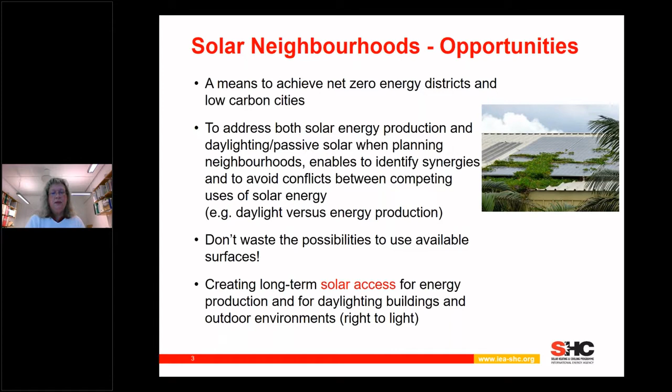So we shouldn't waste the possibilities to use available surfaces in neighborhoods, and we need to create long-term solar access. This is very important. For instance, if you have a house where you put solar panels on the roof, you don't want your neighbor to erect a building on the other side of the street just a year after, destroying your solar gains and your investment. So you really need to secure access to solar access for a long time, and this is something we need to be better at when planning cities.

Going to the project specifically, we started in 2019, and the project ends at the end of 2023, so we are midway now. The objective is to support key players to achieve solar neighborhoods that really facilitate this long-term solar access with good planning.

We work on new neighborhood development and on improving existing neighborhoods as well, dealing with both active and passive solar strategies. We define a neighborhood as a group of buildings within a specific geographic area, often including different types of buildings and functions, open space and infrastructure. The neighborhood can be part of a large city, an isolated community, or something in between, and of course it can be connected to a district heating or cooling network or outside such, which gives different boundary conditions we have to take into account when planning.

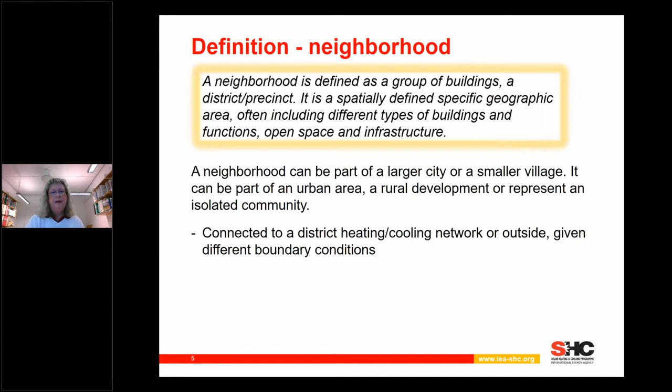And with this, I stop my very brief introduction. Thank you for listening.

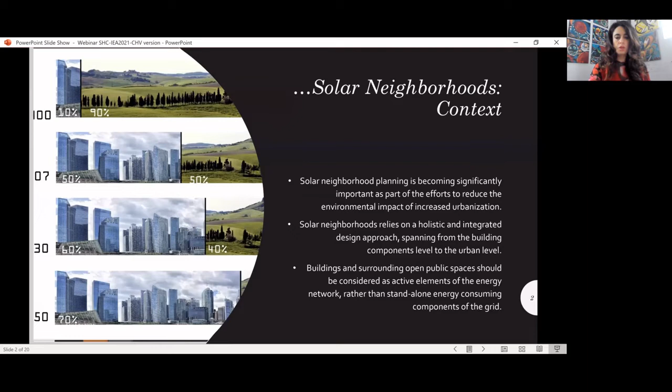Starting with a little bit of context, solar neighborhood planning is becoming significantly important as part of the efforts to reduce the environmental impact of increased urbanization, where by 2050 we are expecting that 70% or more of the world population will be residing in urban areas.

Solar neighborhood relies on a holistic and integrated design approach that spans from the building components and building level to the urban level. Within this holistic approach, buildings and surrounding areas, including public spaces, landscape, streets, and street furniture, should be considered as active elements of the energy network rather than standalone energy consuming components of the grid.

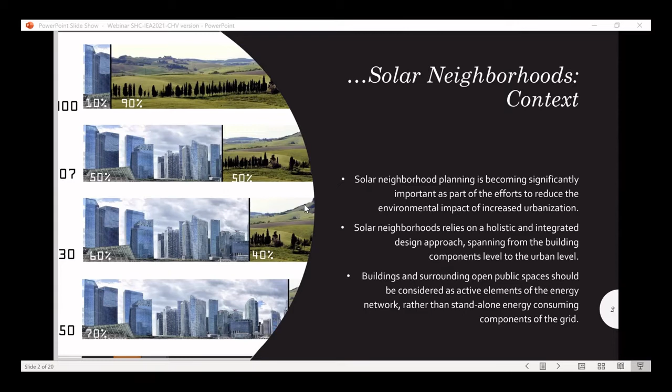So at the building level, solar building design relies on passive design in buildings. In fact, passive design is often attached to solar building design. Improving solar access together with various design principles such as thermal mass, high insulation, and airtight envelope are some of the basic principles of passive solar buildings.

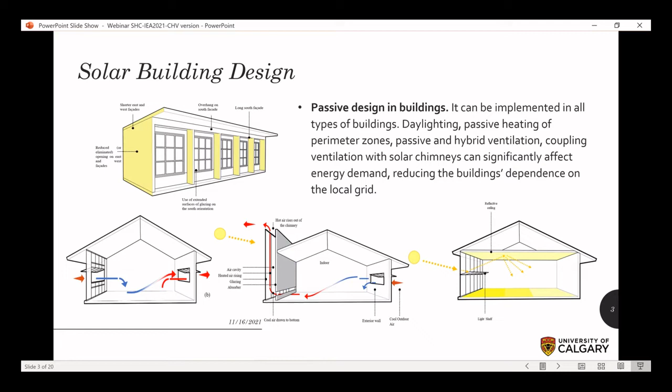Solar building design allows improvement of energy efficiency of buildings, designing building shape, layout, and building envelope to maximize solar access and utilization within the building, affecting the energy consumption of these buildings. It also allows better designed solar energy generation, since a well-designed building envelope can be exploited to integrate solar technologies such as photovoltaic systems, thermal collectors, or hybrid photovoltaic thermal systems for the generation of electric and thermal energy.

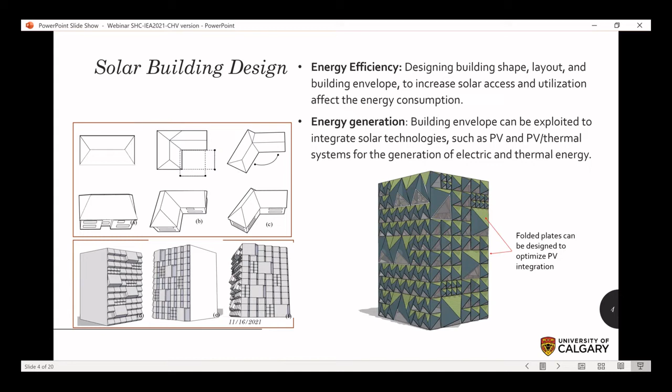Talking a little bit about building envelope design and the integration of technology, building envelope can be optimized to maximize the surface area and the exposure to solar radiation while presenting architectural and aesthetic flexibility. These are some examples of a theoretical study done by myself and my group at the Solar Energy and Community Design Lab at the University of Calgary, where we tried to optimize the building envelope shape and geometry through different designs of folded plates that allow maximizing solar radiation on these plates. We were also integrating different types of photovoltaic systems in different colors.

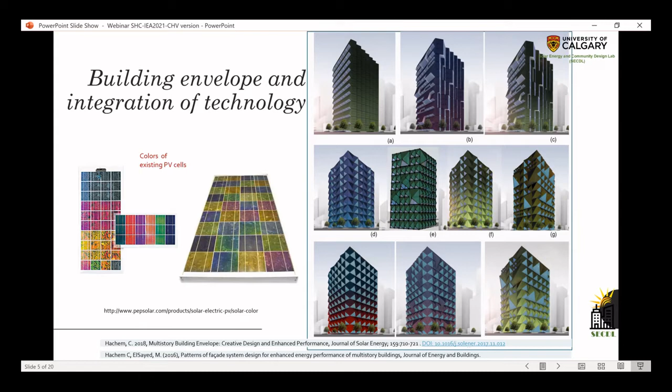At the level of neighborhood, many aspects affect optimal solar planning. For example, the type of neighborhood and the building mix present can affect the building designs and, as such, available surfaces for solar technologies. Also, the ratio of commercial to residential buildings within a specific neighborhood type is important, especially when the goal is to achieve a net zero energy status.

An optimal ratio of commercial land area to overall built land area can be between 23% and 32%. This is according to a theoretical study that we conducted, where according to this ratio, we were able to integrate enough photovoltaic panels to allow achieving net zero energy within a mixed neighborhood.

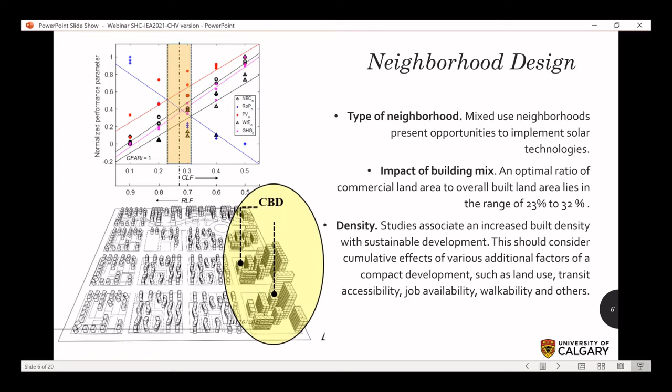Density is another important and critical factor in the design of solar communities. Studies associate increased build density with sustainable development, but this should consider cumulative effects of various additional factors of a compact development, for example the land use, the transit accessibility, job availability within walkable distance, walkability, and others.

There are other important elements in the design of a neighborhood that also impact their solar access and solar potential, and their design as solar neighborhoods. This includes green and spatial areas. Landscape can offer solutions for the integration of photovoltaic panels as well as solar thermal collectors, and allows us to generate more energy that can be utilized in these neighborhoods.

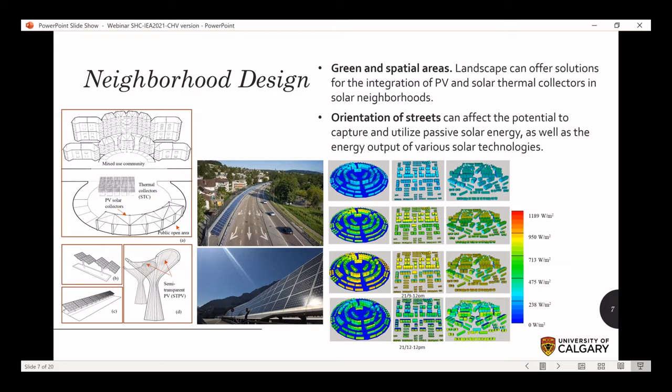Orientation of streets can affect the potential to capture and utilize passive solar energy, as well as energy output of various solar technologies. As such, they really should be considered from early design stage, and the buildings around them should be designed to get the best performance with the best orientation.

Now, talking a little bit more in detail about the work currently ongoing in subtask A, we developed specific designs of archetypes to study solar strategies. Archetypes in this task are considered as representative neighborhoods of existing or new patterns in different countries. This includes repetitive patterns of commonly applied design, such as streets, building types, shapes, density, etc.

Other examples of archetypes can represent uncommon or innovative examples. We have a few of these that were also presented and proposed by the experts in subtask A, such as Sinfonia in Bolzano, the campus in Norway, and so on. Other archetypes can be theoretical cases presented in literature, or especially developed to study different strategies.

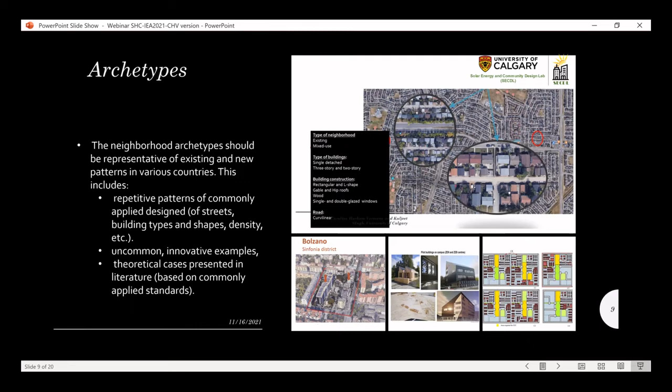Here are some examples of theoretical neighborhoods, and I'll be talking a little bit about these and some examples of the results that we obtained in a couple of slides.

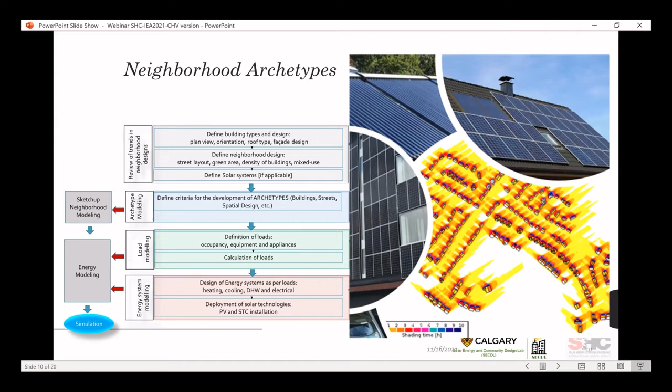The methodology is developed also to collect information about these archetypes, including building types, materials employed in buildings and building envelope, outdoor areas, and also materials employed in these outdoor areas, streets, etc. This information is collected in what we call a matrix, an Excel form that can facilitate input into various simulation tools, allowing urban level simulations. Once the base neighborhood of each archetype is established, various solar strategies can then be analyzed.

Here I'm presenting some of the theoretical examples I just mentioned of neighborhoods, what we call neighborhood units. These are small neighborhoods designed according to various sustainable measures, ranging from residential dominated neighborhoods to higher density neighborhoods with commercial centers that include different types of trades and different types of buildings.

The study aimed at analyzing various renewable energy and the role of solar energy for thermal and electrical production. I want to highlight that the PV were accommodated in roofs and some portion of the facades when available, that means when we have higher rise buildings. Solar thermal collectors are accommodated in parts of the roofs when PV area allows for this, and in landscape areas.

Results of this study show that PV electricity plays an important role in fulfilling a significant portion of the total electricity need of all the neighborhoods, especially up to 95% for small scale or less dense neighborhoods.

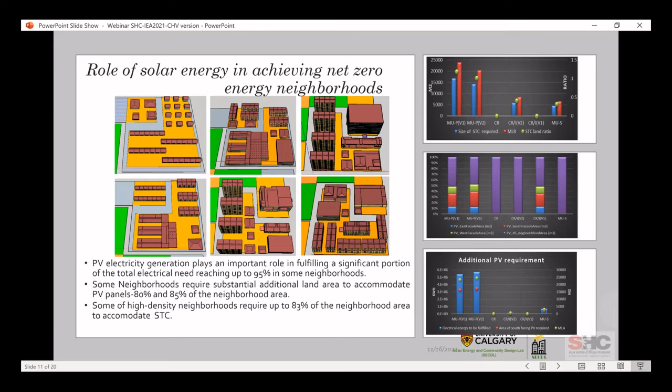Some neighborhoods with high density and high amounts of commercial building need additional land area to accommodate PV panels that fulfill all the electrical load, and this can be quite significant, about 80% to 85% as compared to the total land of the neighborhood. Some of the high density neighborhoods as well require significant additional area of landscape to accommodate the solar thermal collectors to fulfill the thermal requirement.

In this example, some of the small neighborhood units shown before were combined together, according to their electrical energy performance, to allow achieving net zero electrical energy. In this case also, PV plays a significant role in achieving net zero electricity status. In all these neighborhood combinations, the major portion of the PV electricity is supplied by roof-mounted PV systems.

Also, the study shows that on-site sources can supply between 19% and 45% of the thermal requirement for the neighborhood combinations, but we still need additional solar thermal collectors, especially in high-density neighborhoods and larger neighborhoods.

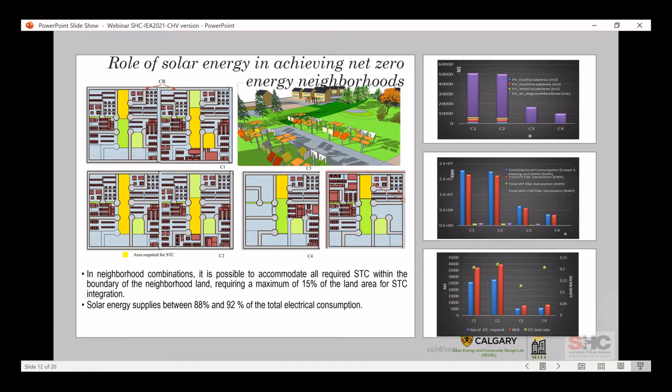This landscape area that's required to install these solar thermal collectors is significantly lower than the examples I showed before for the smaller neighborhoods. The landscape area can be about 15% of the total land of the neighborhood, which is much lower than examples before, but also more feasible from an urban planning point of view.

Now, coming to the design of solar strategies and their analysis, different solar strategies will be analyzed using the archetypes or archetype concepts I just talked about. This includes, but is not limited to, integrated solar technologies in roofs and facades, and landscape integrated solar systems that can range from very traditional standalone elements to more interesting and more designed approaches.

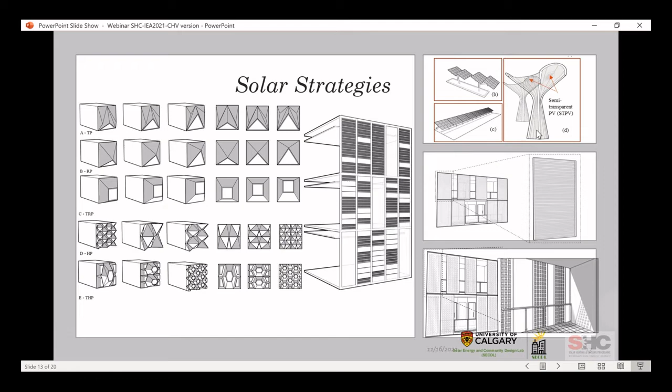The workflow is developed to implement and analyze solar strategies, taking into account various factors such as spatial design of the neighborhood, the optimal surface areas to integrate technologies, neighborhood operation, and interaction with the local energy system, both electrical and thermal.

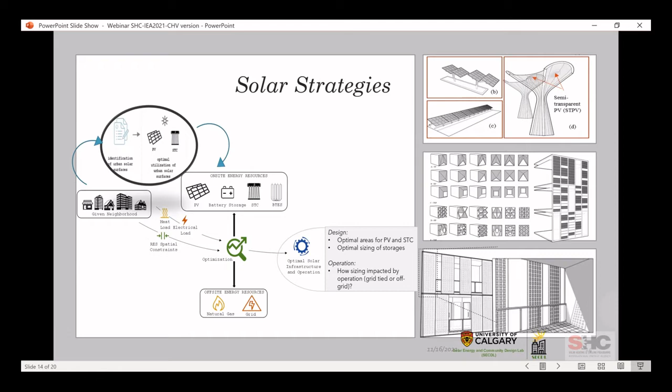Coming to the deliverables of subtask A, there are a number of deliverables, but I want to highlight the most important. Two summer schools or fall schools are designed. One of them, a fall school, was already conducted in September, October of this year, attended by about 14 PhD students from 6 countries who were trained in complex urban level simulations. Instructors from 9 different institutions were involved in the training. The next summer school will be conducted next year, hopefully in person in Calgary.

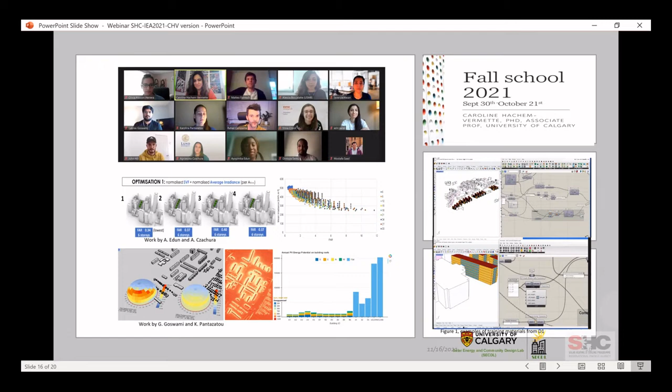The final deliverable of subtask A, still under development, with results and analysis conducted to get to this stage, will consist of a web-based database that presents various solar strategies and their potential application in example neighborhoods under different climates. These neighborhoods, or solar technologies, can be selected according to the type of neighborhood and the available archetypes that were studied, with results shown to give an example of how to apply these solar strategies and what their impact is. This can offer flexibility of design for planners, architects, developers, and other key stakeholders by presenting examples of potential solar solutions for different settings.

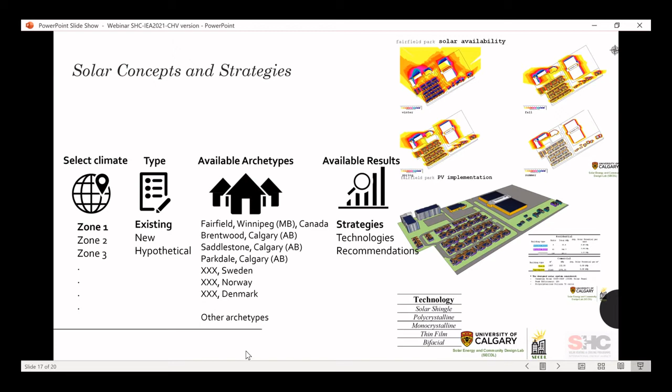And with this, I would like to thank you for attending this webinar. If you have any questions, please direct them to the organization of the webinar, and I will be happy to answer them as soon as possible. Thank you.

Well, this was an interesting insight. I think we understood a lot about what case studies play, how important they are to understand the planning process, and tool usage when doing this complex neighborhood planning. So we will see how questions to Caroline can be also tackled by the other speakers, otherwise we will gather them as Caroline suggested. Also, I want to apologize for any inconvenience you had regarding this video, it seems some of our participants had either audio or video problems. I hope most of you were able to see it, and the recording will be available at the ISES website some days after the webinar, so you can watch it in peace then.

Okay, so we come to the next speaker, from Italy, it's Silvia Croce. She is a postdoc researcher at the Institute of Renewable Energy, EURAC Research in Italy. Her research work aims at gaining insights into solutions for an integrated design of the urban, built, and natural environment, with a focus on outdoor climates, thermal comfort, energy savings, and renewable energy production. She's a building engineer and architect by training, and holds a PhD in engineering.

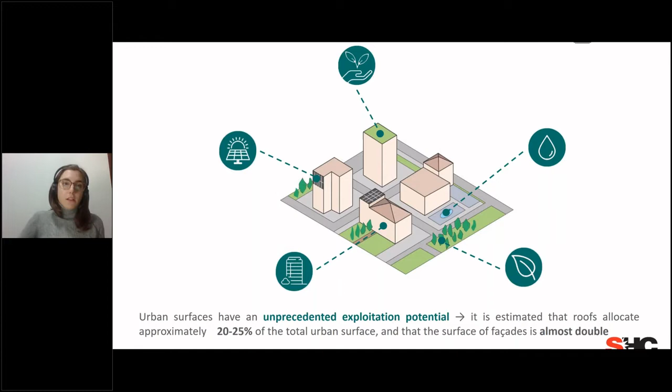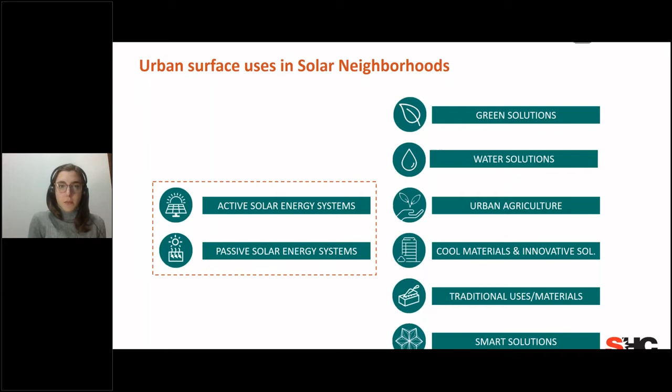So what we are focusing on is not only active and passive solar energy systems, but a broader variety of solutions which we collected and discussed among the task experts in subtask B.

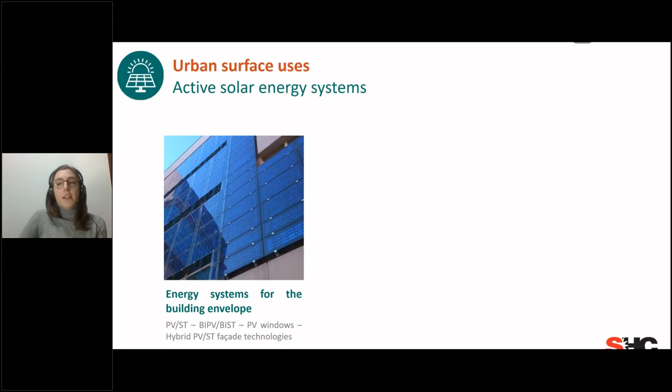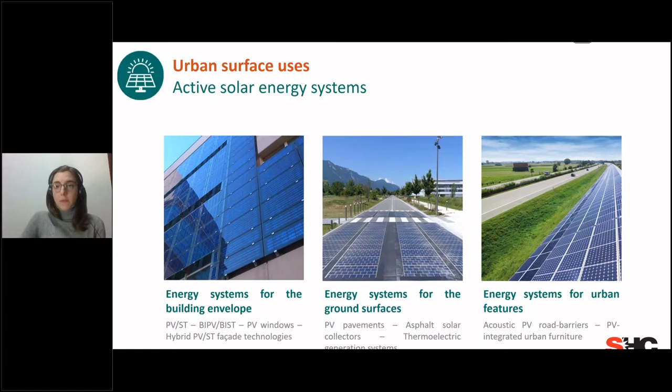And when we refer to passive solar energy systems, we focus on passive solar heating and passive solar cooling. But we also broaden our focus to other solutions, as I previously mentioned.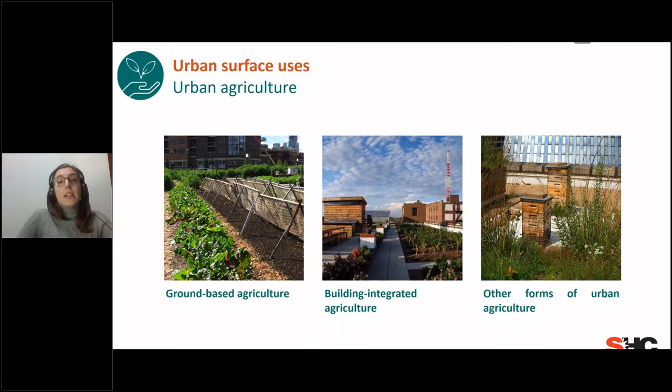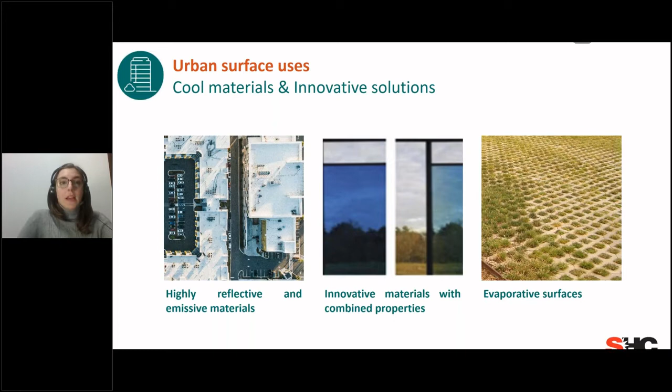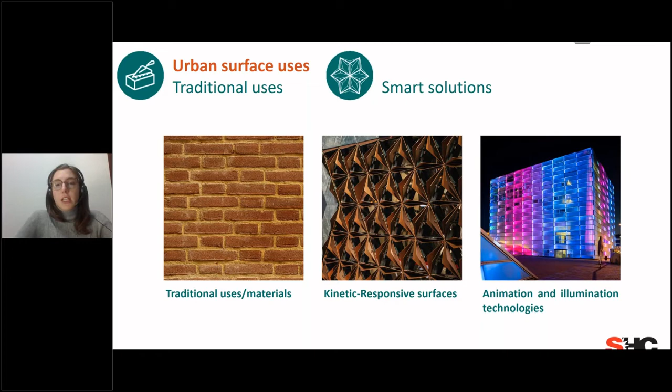What we then discussed in subtask B are the conflicts and synergies which may arise among surface uses. So the question we posed ourselves has been: can we integrate solar active and passive systems with other solutions in order to better exploit urban surfaces?

What we did was create a sort of matrix in which we analyzed conflicts and synergies among solar active energy systems and other solutions.

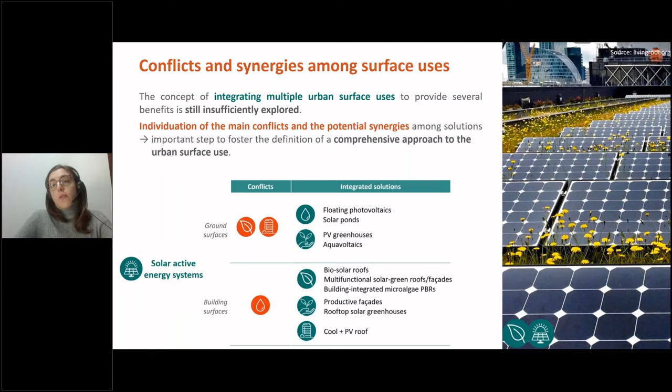One case is the one you can see in the picture on the right, a biosolar roof, which integrates PV systems with a green roof, which also acts as a cooling element for the panels and helps in enhancing energy efficiency. But there are also other solutions, such as multifunctional solar green facades and cool roof integrated PV. So just an example of what we would like to do in fostering the use of urban surfaces.

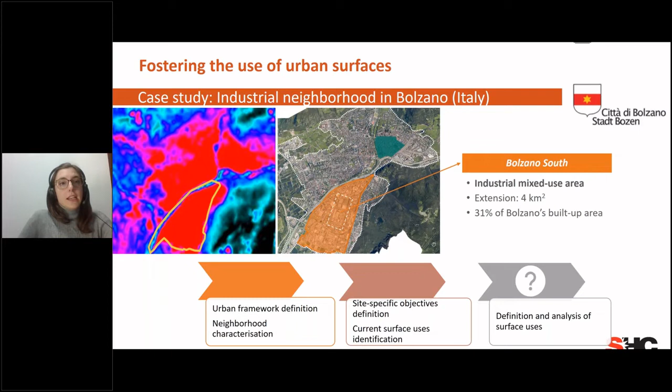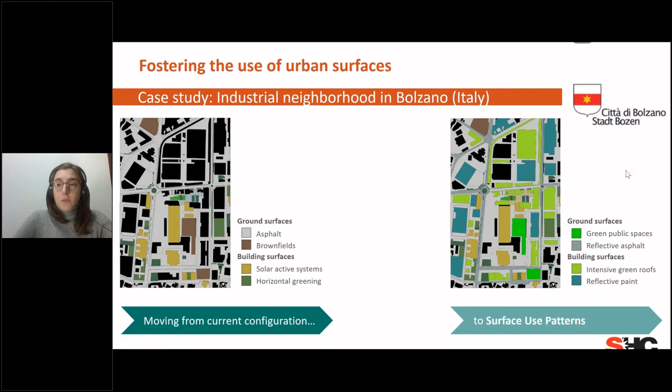What we would like to propose through our activities in the task is a methodology for moving from the current configuration of the district, which integrates common surface materials and some solar active systems, to a surface use pattern: a configuration of the district which integrates also more innovative solutions, in which the use of solar active systems is enhanced, and there are also other solutions such as green solutions.

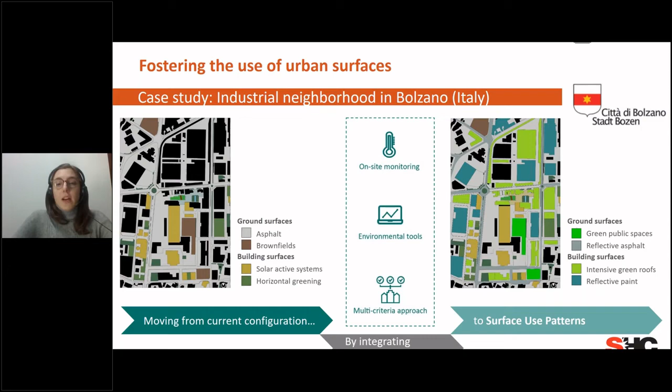How this might be done is through several methods, integrating on-site monitoring, the use of environmental tools, and also multi-criteria approaches.

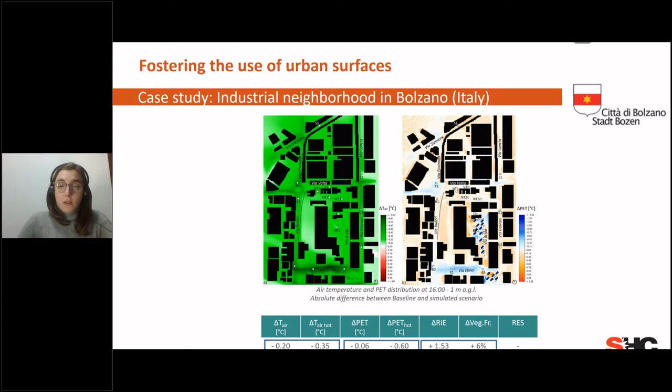So what's coming next in relation to these activities in subtask B and task 63? First of all, by the end of February, we will release our first deliverable, a report on surface uses in neighborhoods, focused on how to define the most suitable uses, but also avoid conflicts and create synergies.

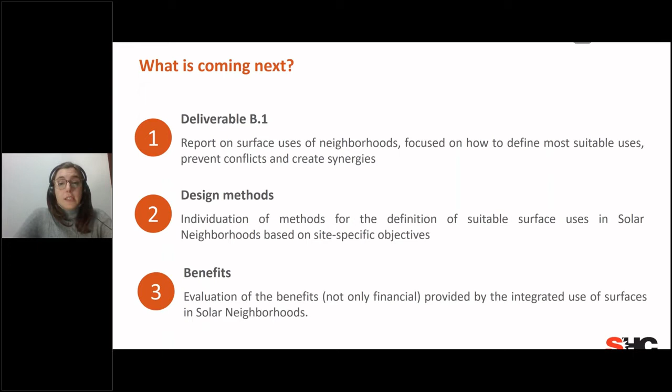If you're interested in the topic, keep an eye on our website, you will soon find our first deliverable. We will also focus, as in the example shown, on the individuation of methods for the definition of suitable urban surface uses in solar neighborhoods, based on site-specific objectives. We will also focus on benefits, not only financial, but also environmental and social ones which an integrated use of urban surfaces might provide in solar neighborhoods.

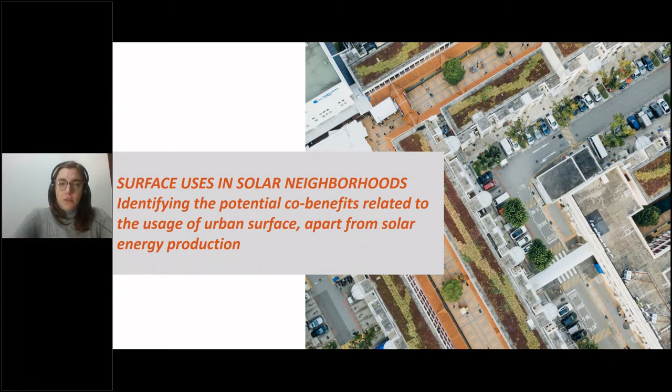And in relation to this, we are actually working also on the identification of potential co-benefits related to the use of urban surfaces in solar neighborhoods.

What we highlighted in our discussion and work in the task over these 2 years is that urban surfaces are a key resource to tackle several issues related to urbanization and climate change. They offer benefits not only related to production of renewable energy, but also other sustainability benefits, for example the availability of rainwater and food provision, but also benefits in fostering climate resilience. For example, they allow improved management of urban climate, preservation of habitats and biodiversity, contribution to stormwater management, and the amelioration of air quality.

What has been the first step in understanding the relevance of these potential benefits in solar neighborhoods? It has been a survey which aimed to identify priorities in the design and implementation of solar neighborhoods. We asked participants to evaluate 55 urban challenges from 0, meaning not at all relevant, to 10, meaning extremely relevant.

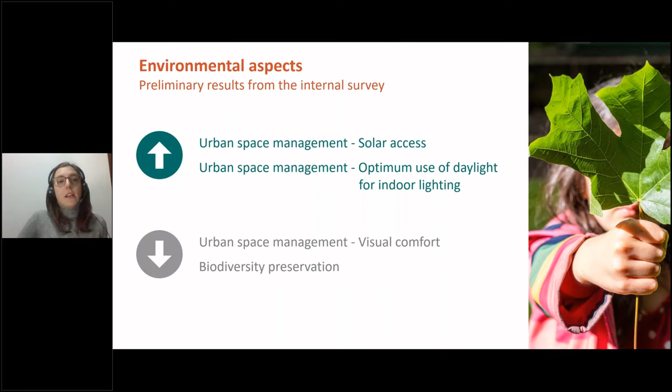Another aspect we are analyzing is resource management. In this case, modern and renewable energy source and provision of clean and local energy consumption were identified as the most relevant, while waste reduction and food security were less considered.

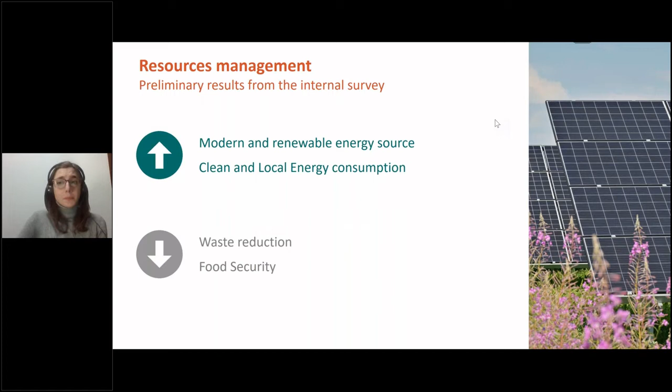As I mentioned before, the survey is open to everyone and will take approximately 10 minutes to complete. The answers will be anonymous and the results will be reported in an aggregate way.

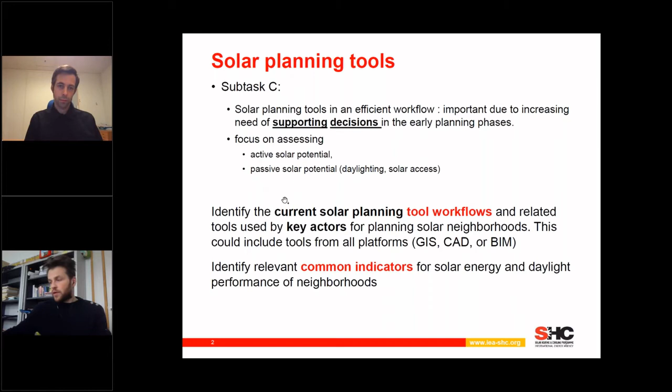An illustration of the complexity can be seen from Emilie Nault. In the planning of solar energy neighborhoods, many different factors appear, and one of them is the scale. If you take the urban scale or the building scale, you have many different things to address. The data is not the same, the quality of the data is not the same, and there are different layers of tools that you can use, and also different types of actors and users at each step.

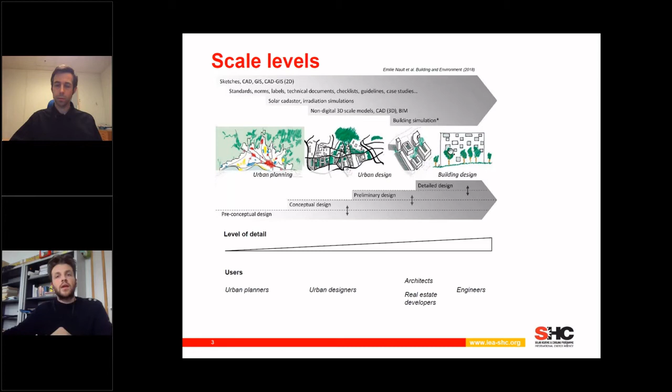So in what follows, we will show you some achievements from subtask C: one about gathering smart and relevant performance indicators, one about trying to gather workflow stories to identify current tools and best practices, and some comparisons of current tools.

For instance, when it comes to direct solar access, some countries' legislation states that a bedroom should have at least 2 hours of direct solar access at a certain date, while other countries might say 1 hour or 3 hours at another date. There are pretty big discrepancies between countries, even those at the same kind of latitude.

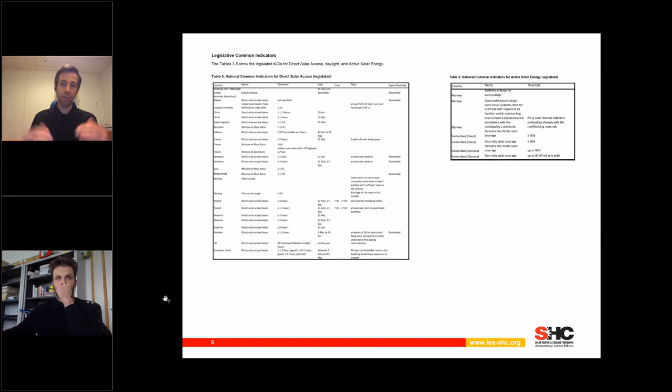When it comes to active solar energy legislation, not many countries actually prescribe that when constructing new buildings you have to install an active solar energy system, like PV panels or solar thermal panels. So it's interesting to see the difference between the different countries.

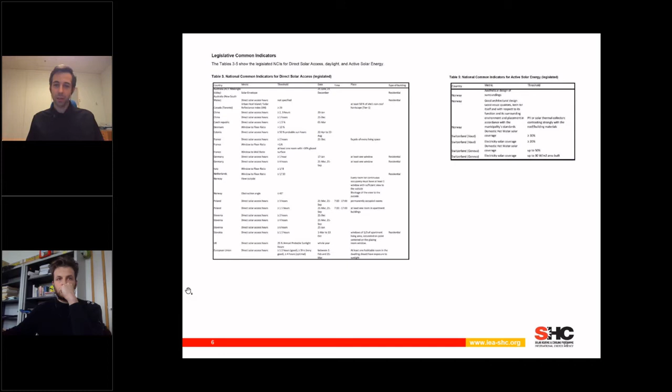Can you do next, Martin? Yeah, so then we looked at the implications of those different common indicators. We took 3 national common indicators to showcase the implications of those common indicators.

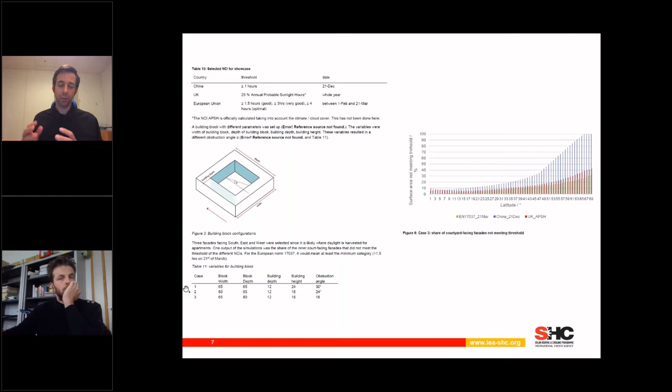So we took a rather random courtyard building and simulated it at different latitudes, meaning we looked at the different solar conditions at the different latitudes, and then applied the different national common indicators to this. On the right hand side, this graph shows the share of the courtyard facing facades that are not meeting the thresholds of the national common indicators. Of course, the higher the latitude, the harder it is to reach those thresholds.

You can see this pretty well in this graph. Again, it demonstrates the fact that even countries at the same latitude might have a very different approach to what solar access is and what level is considered good solar access.

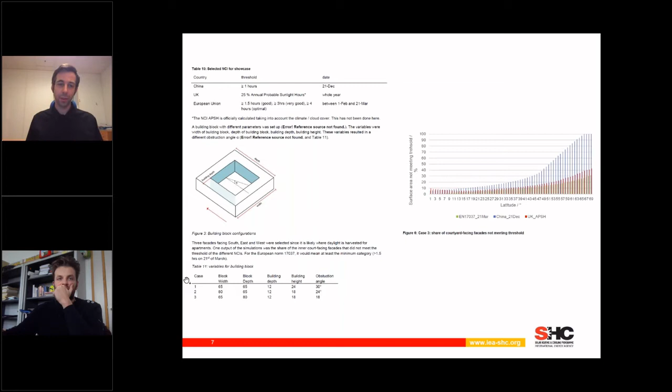Next, please, Marta. Then, parallel to gathering the national common indicators, we were also interested in how key actors in the design process of solar neighborhoods use tools, and that's why we have what we call the workflow stories, where we gathered this.

But what we were also interested in was not only the key performance indicators, but also which tools they used to assess those indicators. So for each of these workflow stories, we asked the people who wrote them to provide input for the tools, but also output, and to describe the workflow.

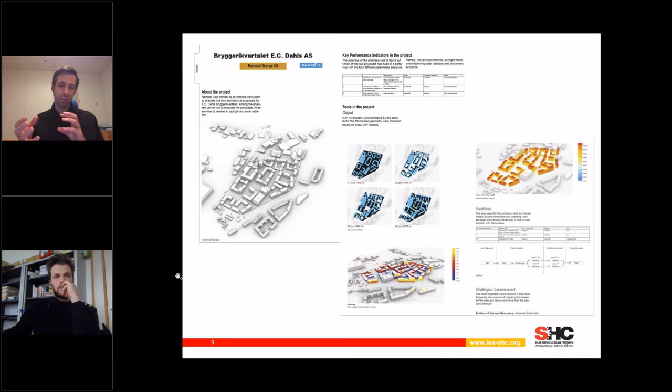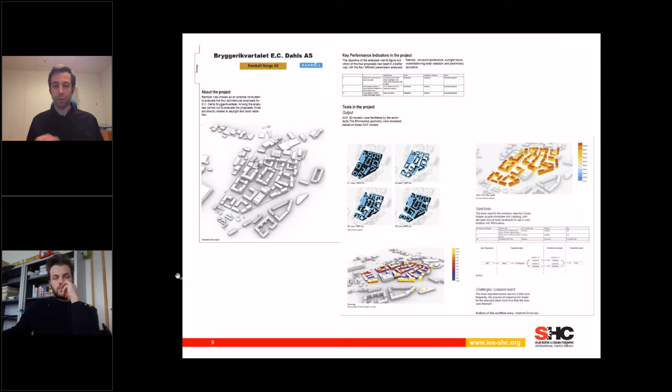Since urban planning is a rather difficult process, you might have different data available with different quality. So it might be that you have to use different tools in order to give an answer to the performance of a neighborhood. Can you go to the next slide, please?

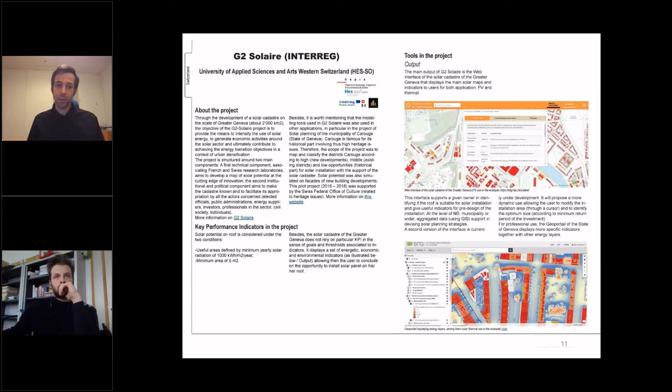And here also, it's not very simple to do all these kinds of simulations, and you have to find a way - sometimes you even have to develop your own modules in order to get the result. So here's just an overview of some of the other workflow stories that we gathered from different companies or academics, where people used different tools to analyze the potential of solar neighborhoods.

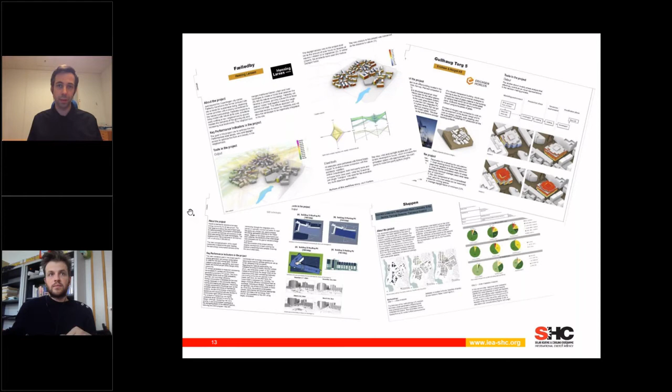Yes, Martin. Okay, so I will finish with one last thing that we wanted to study within the task. As Jouri just mentioned, there are a lot of different tools, and one thing we thought was to try to use a maximum of these tools doing the same task - what we call here a benchmark study.

For this study, we set up some rules, which are quite simple. We use two different districts: one which is like a grid district, and the other one which is more random. It's happening in Geneva, and we provide the experts with the geometry, the location, as well as the weather data, so that everyone is supposed to have the same simulation initial conditions.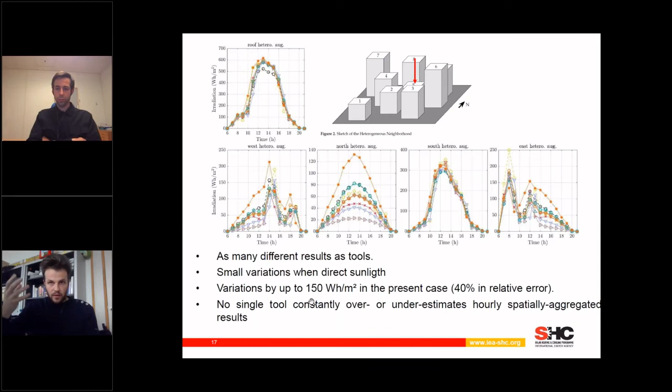We can see there is usually less variation when there is direct sunlight, for example on the roof or on the south. We have variations that can reach up to 150 watts per square meter. And we don't have one tool that is constantly over- or underestimating the solar irradiation predictions.

Another way to analyze the data is to draw this kind of facade mapping. Here I went back to this homogeneous district, showing the east facade at 10 and 11 a.m. What you can see is the distribution of the irradiance. When it's red, it means a high value of irradiance, usually direct sunlight, and when it's yellow, it means a shaded part of the building.

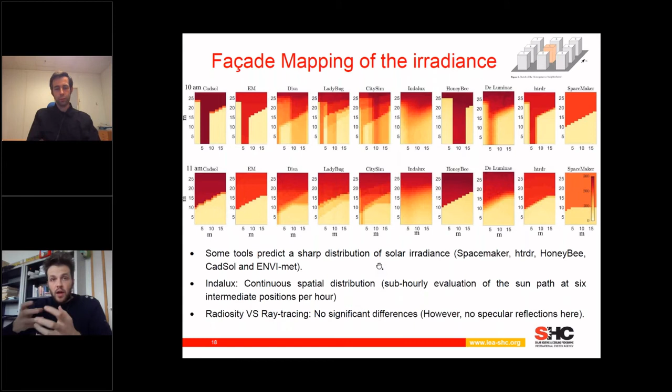To finish, we are at the midterm of the task. What we plan to do is create a roadmap for improvement of the workflows and solar planning tools. We showed you some of the results, and all these first results and studies are here to set a state of the art, a status - where are we now, what are the tools, what are the KPIs, how do different tools perform compared to each other.

Then in the second part of the task, we want to build a vision of what we should do, and set different milestones in order to improve this workflow in the context of a solar neighborhood. Thank you for your attention.

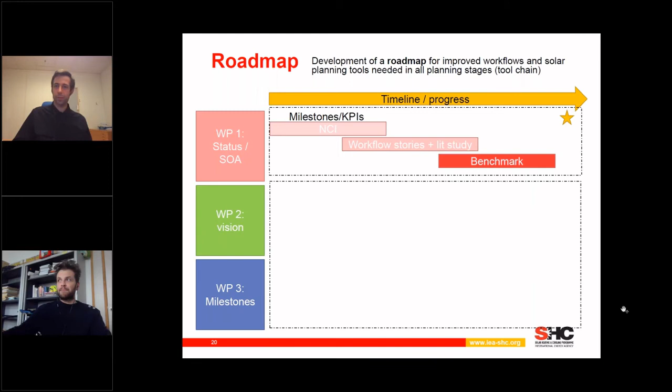I think we have some really tricky questions, but the first one I want to address to Maria, because one of our participants wants an overall definition of solar neighborhood. So what is your definition for this solar neighborhood?

Well, as I mentioned in my presentation, a neighborhood is really this group of buildings with different, or the same, type of buildings and uses. But a solar neighborhood is, I would say, when you strategically use solar to achieve sustainability goals like zero emission, zero energy, or plus energy neighborhoods and so on. So it's when you're really focused on developing different solar strategies, which could be passive or active use of solar.

Then we have questions which were addressed to Caroline, but we said we would try to get an answer here. One question: what is the assumed load profile for the simulations? I think the person is asking whether the electricity used in these simulations is typical for today, or already considering future electrification scenarios, where heating and mobility will also be electrified and the electricity demand will increase overall.